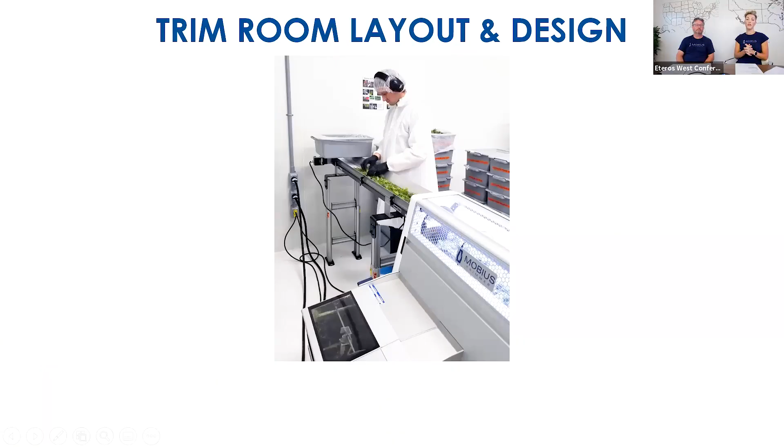So when we're taking a look at trim room layout and design, airflow and temperature management are the 2 key factors you want to take a look at. A lot of you may or may not have the ability to make a lot of changes to this in your facility, but ideally we want to be keeping the temperature in the room as low as possible. So in Canada, we would say trying for 18 degrees Celsius or lower. In the States, that's about 64, 65 degrees Fahrenheit or lower.

That's really going to help out with managing the resin buildup on the product and just keeping the product in nice condition as it's in the totes waiting to get trimmed or after processing. So trying to keep that temperature down low, and airflow really helps there as well. We want to make sure not only is the room staying cool, but that it's staying nice and clean in there. So air handling units connected to the room.

If you've already got a full build out and you feel like you need a bit of a boost there, if you can invest in some air conditioning units for the room, that will really, really help out. Second thing, if it's possible to have two entry and exit ways in the room, that is really helpful for preventing bottlenecks. So if you're in the midst right now of planning for construction or doing a renovation and you haven't put that into your plans, try to have those two separate entrance and exit points for the room.

If you've only got one because you're already built out and you've just got a single door, and actually that's the situation for Curtis's facility, try and have a recognized flow of traffic for the room so people know where things are coming in and the timing for that, and how things are moving out of the room, because you're not generally just talking about people moving in and out, but you're moving in carts and totes, maybe scales, things like that. So you need to be managing that traffic.

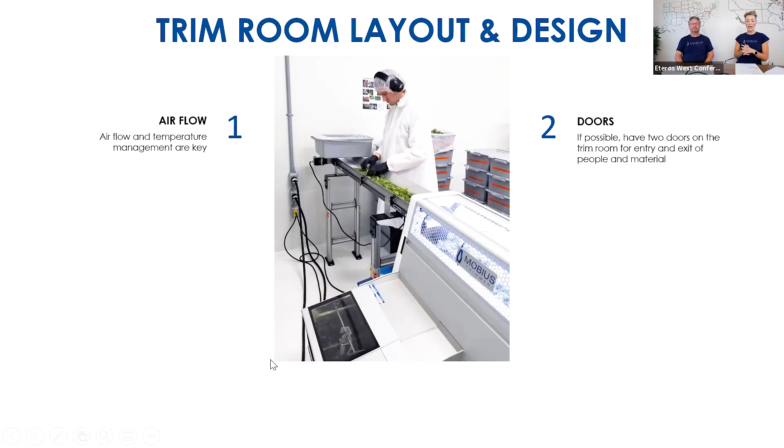Clear out the room to the greatest extent possible. So I went into a trim room last month, and it was a pretty tiny room, and it seemed extremely cramped. When we started looking around the room, there were brooms in the corners, some tools, some tubing that had been stacked up. There was a giant tote in one corner with cleaning materials, even though this wasn't the cleaning room. And by the time we cleared everything out, there was plenty of room to be running a tandem line in that room. So get rid of any extraneous materials that aren't there for your operations. And that is going to make setup a lot easier and prevent any kind of bottlenecks or oversights.

So that then leads to the next point, and that is around planning for circulation space. So when you're trimming, it is not necessarily just a static activity. Sure, you've got the people that are stationed at the in-feed and the out-feed doing QC, but we need to have somebody who is checking on the trim tote getting full. We need to have totes of material coming into the room. We've got totes of material leaving the room. So having circulation space around the equipment is really key. So again, empty the space out and plan to have circulation around the overall trim lineup.

Electrical connections. So to the greatest extent possible, try and locate your electrical connections near the trimmer. So on the Mobius trimmer, the electrical connection is on the back side of the machine. So we would generally recommend that the back side of the machine is adjacent to the wall where you have your plug-in point. If you're working from plugins on the ceiling, try and have a power cord long enough so that it drops onto the floor first to take the weight of the connection point before going up into the ceiling, and you'll be preventing shorts.

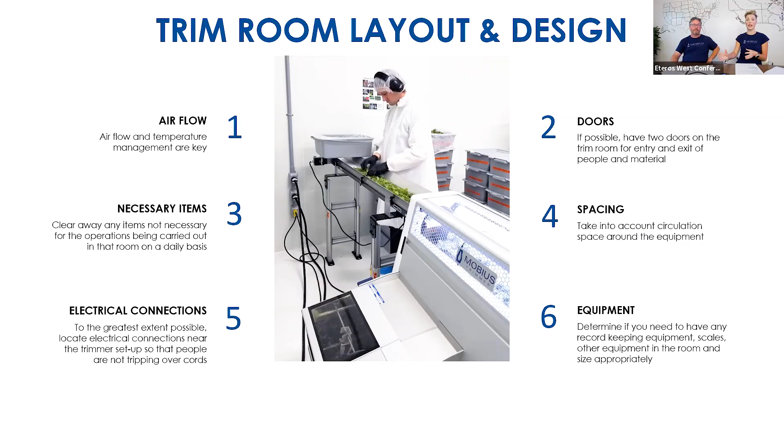So think about the traffic flow between those locations. And then finally, under trim room layout and design, think about where the equipment will be washed at the end of each trim day. So are you going to be rolling it out into a separate wash bay? And if so, is that wash bay all the way across at the other end of the facility?

If you have the ability to change that location, you'd like to have it as close as possible to the trim room. Oftentimes it's the wash bay that can't be moved because you've got drainage and that in there. So if it's possible to move your trim room closer to it, that's ideal.

Cleaning is something that we're going to have a totally separate webinar topic on because it's a really big topic. But if you are going to be doing cleaning either in a separate wash bay or even inside the trim room, think about how you are allocating space to store the equipment when it's not in use and to leave it out to dry. So after washing, it's not good to be leaving stuff out there unless it can properly dry. So leave yourself enough space, enough horizontal surfaces so that things can be cleaned properly and dried properly.

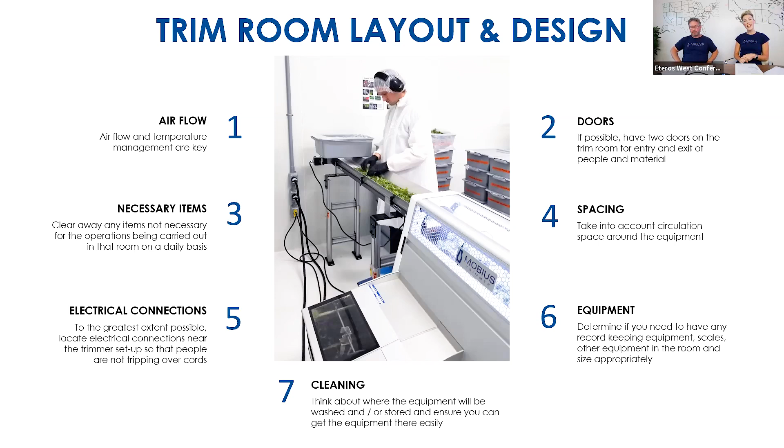I'm going to hand it over to Curtis now to speak to some of his experiences in setting up the trim room at Can Group. Just before you do, if I can just jump in real quick here, don't forget, guys, you got a whole team there, and there's always going to be one person in charge who has to make the final decision. But don't be afraid to ask your whole trim team, hey, what sort of space do you need? How do you envision this flow going? It's great to put all your minds together and come together with something that works for everyone.

Good point. That's exactly it, Brett. I was going to say, you've always got to be willing to work with the team. The team is what's making the machine work. If the machine's not working because the team's not working, then you're losing money. We've spent great money on a great machine. We want to make sure it's working best. So that being said, always be willing to experiment with the layout of your machine and your room.

Know that you need at least 2 feet of walking space around any piece of equipment. So whether you've got the trim tote to come out, or you've got a collection tote, or you've got the in-feed conveyor, give yourself at least 2 feet behind every worker. So that if you're walking through with a tote in your hand, out front of you like this, you don't accidentally bump somebody who has a pair of scissors in their hand. It's just easy to give yourself the space and not worry about it later. That's pretty much it for that.

The trimmer can be set up on the original visit by Mobius, but that's not necessarily a dead set way that it has to be. Our trim room was originally set up with the vacuum being put towards the wall, the trim tote being put towards the wall. But our workflow in our room prevented us from having an even flow and an even movement. So we just inverted the machine and turned it around.

All right, back to me for product handling and flow. So a lot of what I want to talk about here is just some comfort items and convenience items that you can give a little thought to beforehand. So whether I'm working on my car or whatever else, I always like to make sure my tools are set out within reach. I know what I'm going to need. I don't have to climb out from under the car, go back to the workshop, get a wrench, blah, blah, blah. So a lot of that is what I'm going to sort of cover here in relation to the trim room.

Let's start off with when you think about what the convenience items are and how to gain your efficiencies, we always recommend conveyors. Our machine comes with a hopper that you can hand feed, but a conveyor provides that extra consistency, etc. So I had a call from a guy, bought the conveyors and says, gee whiz, they don't fit in the room. Said, hey, try kicking the infeed to an L and see if that works. And sure enough, it did. So the L wasn't the ideal layout compared to a straight line, but compared to not having one at all, it was fantastic. It was definitely a worthwhile compromise.

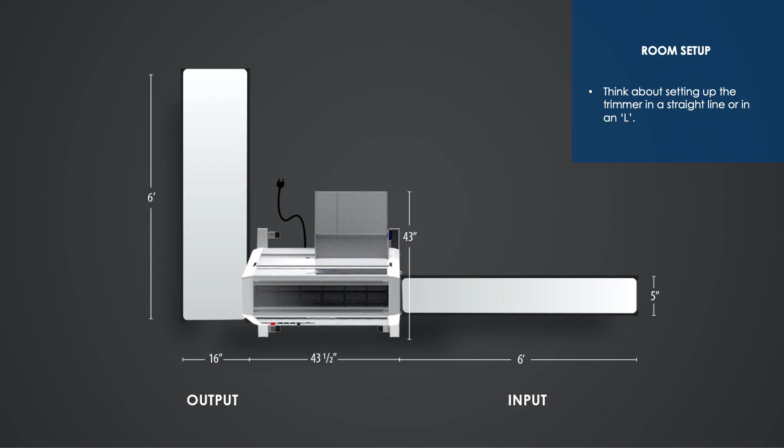When you're on your infeed, you want to think about providing the infeed position with anti-fatigue mats. Comfortable employees are more productive. They're not going to wear out. They're going to give you more consistent results and just be happier in general. So give them an anti-fatigue mat on that epoxy floor of yours or the concrete floor, so they don't mind standing there all shift long. Also outfit your staff with comfortable, easy to wear, high quality hearing protection. These machines are loud. No two ways about that. And so the more comfortable and better protected they can be from their environment, the happier and more productive they're going to be.

As a matter of preparation, quite often the material comes into the room bagged. Now that bag might be tied in a knot at the top, or it might be sealed with a zip tie or some kind of a twist tie, etc. So get ahead of the game a little bit, untie the bags before you need them, before you run out of material. In the case of a tied bag, it's just a matter of convenience. In the case of a bag that has a zip tie or a twist tie, those are items that can fall into your conveyor and shoot through the machine. So it's kind of an ounce of prevention being worth a pound of cure there as well.

You want to have your material that you're about to trim prepared at an ergonomic height, something that's easy for the infeed operator to reach, to access, so they never have to leave their position. So the common practice: you've got the operator, you've got the infeed conveyor belt, and in behind you've got totes raised up to a comfortable height that the person can reach across the belt either by hand or with a scoop and fill the belt. So they're not bending at the waist, bending down, coming up, bending down, coming up.

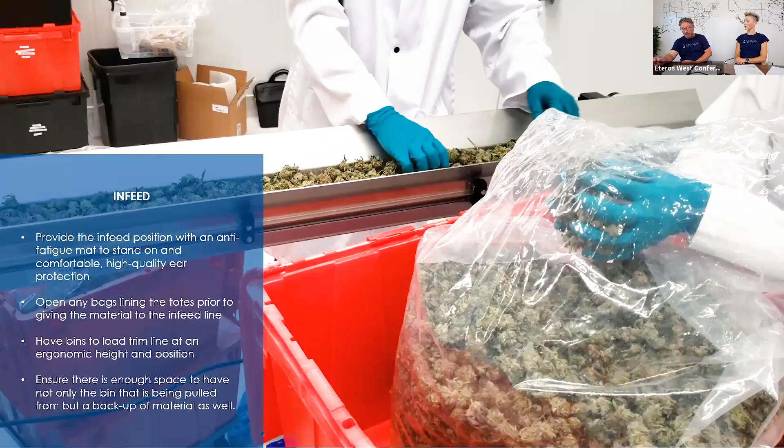So part of that preparation also is not just the space for one bin or bag, but two, so that when that first bag runs out, that operator doesn't have to fumble and switch and whatnot. They've got the second one ready to go, and then a teammate can take the empty away and put a fresh full one there. So just one of those things that will maximize efficiency for you.

On the trim tote, what you want to make sure of on the back side of the machine when you're monitoring your trim tote levels, when it comes time to shut things down for a moment and swap out that trim tote, you want to make sure, again, you've got that 2-foot barrier. You can get behind the machine.

You're not opening the trim tote like banging into a wall. You've got the room to operate there and have a second trim tote sitting right there ready to go, so you make that swap as timely and efficient as you can.

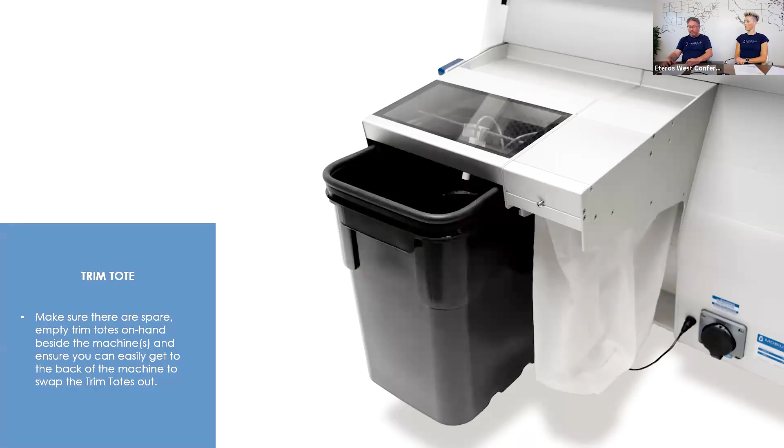On the outfeed, it's going to be very similar to the infeed with a couple of additional things there. You're going to want comfortable seating, whether it's a stool that rolls around or a chair, again with your hearing protection. And also think about your investment in a high quality tool. So don't go cheap on your trim scissors, etc. Get a good quality set of scissors in the hands of your operators so they can perform longer, better, etc. Not wearing their fingers out quite so much.

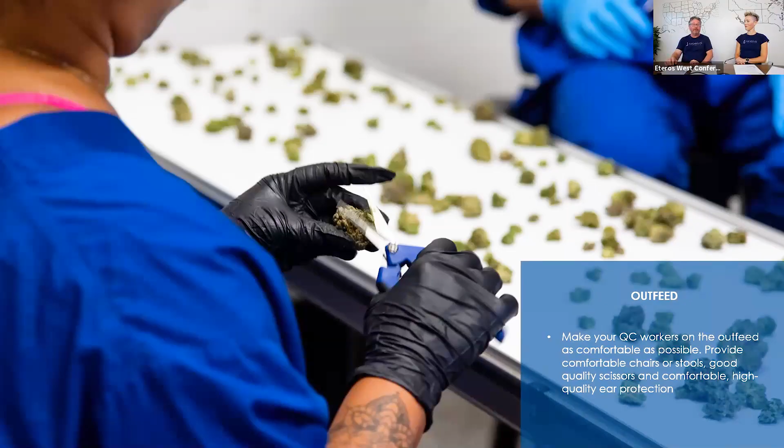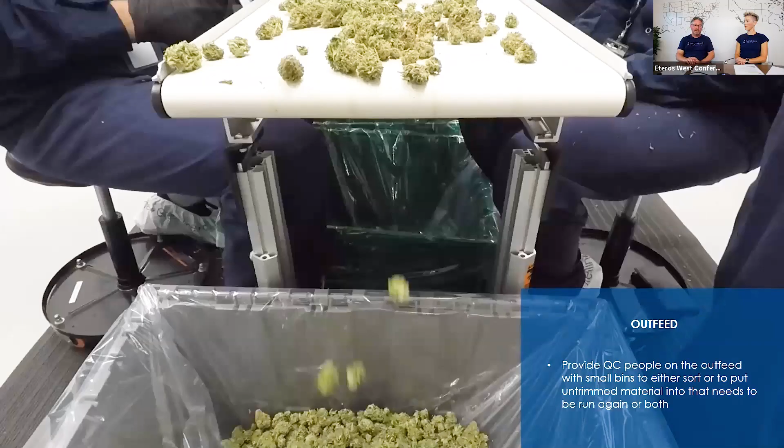Another great idea for the outfeed guys is to have a couple of smaller bins, whether it's a trim tray on your lap or a bin hanging off the side of the conveyor, etc., that you can on the fly pick out smalls, or in the case of something that's come out of the trimmer that's not quite trimmed, you don't want to spend a bunch of time snipping away at that bud. You just want a couple of snips, 2 or 3, and if it's more than that, just set it in a bin, and every so often you can take that bin, send it back through the trimmer, so you're not wasting valuable man hours on actually hand trimming. Let the machine do the work.

So I think there's my final point. I covered it without even looking at my points here. That's how good you are, Brett. Wow. So I'm going to hand over to Kurtyss here to sort of add to what I've just said there.

Absolutely, Brett. It is crucial, what you said, to have that second tray for when you see those smalls. Smalls are generally not the problem. Smalls just go, they make it through. If you have a sorting machine, that takes care of smalls. It's the large ones that we want to see. The machine missed it because it was in the clump. That's not a problem. You see it come out, you see it has tips. Put it on the tray.

Then your floater can come by when he sees that tray that's large, pick it up, and he just shakes it out under the infeed. Doesn't even take a second. 2 snips, let it rip. If you're sitting there staring at the bud, you're wasting time, you're wasting money. I mean, we're not here to appreciate it, we're here to produce a product. So if you touch it more than 3 times, you're playing with it. Send it down the line, send it up the line, just get it going.

So pretty much make sure that the bucker is fed, because the bucker is the start of the machine. If you have one, you're laughing. If you don't have one, then you've got people sitting at a table debudding and taking everything off a branch. Well, that takes time, and that's what the bucker's for. So get it clean, get the bucker working fast, and make sure that it's always feeding that infeed conveyor.

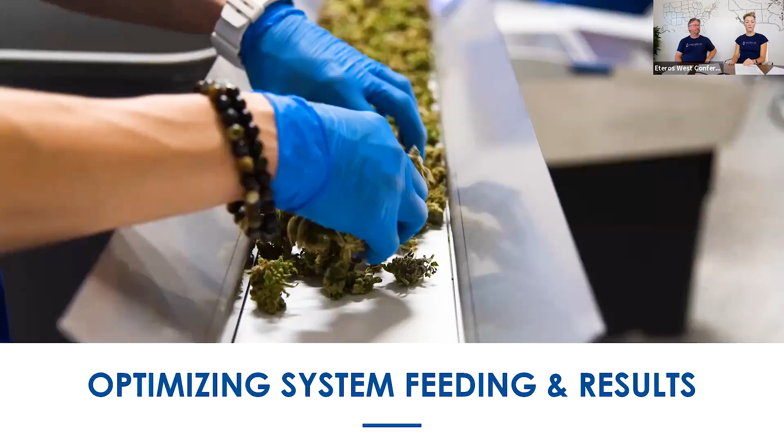Okay, so we'll head into the third section here. The third section is around optimizing system feeding and results. So we are huge fans of in-feed conveyors. If you want to maximize your productivity and really increase quality, it is necessary to have an in-feed conveyor. There are some different ways to approach things on QC if you don't have an outfeed conveyor, but it's really tough to replicate an in-feed conveyor with anything else.

So there's 3 reasons why you'd want to have an in-feed conveyor. One of them is around catching foreign objects. Brett just spoke about this a moment ago, where as you are bringing totes into the room, if they've got a zip tie or anything like that around them, there's a potential they can go into there. Over the past month, I have heard of scissors, bolts, nails, zip ties, and gloves all going through the machine or being caught just before going through the machine for those that are using an in-feed conveyor.

Those that are using just a tote to load the hopper have had some struggles. So having that in-feed conveyor to do the visual inspection to pull out any foreign objects that manage to get in there is key. The second thing is a consistent feed rate. For a lot of people, this is the most important piece. It's really challenging to get a consistent feed rate if you're using an in-feed hopper.

What happens is material gets swept into the machine, so it pulses it, and then the operator generally has to wait for it to move through before they sweep in the next batch of material. With the in-feed conveyor, you've got a consistent amount of material being moved into the machine all the time. And when you've got a consistent feed rate, that gives you consistent results on the outfeed.

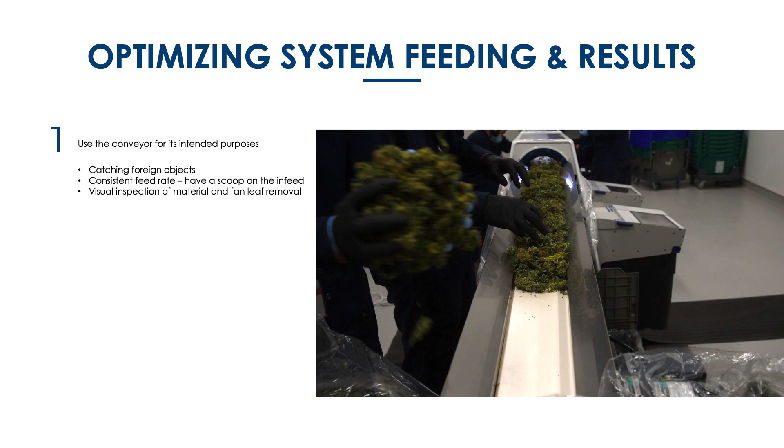The machine is more than capable of handling those fan leaves, but the problem is if you're feeding them through the machine, you are reducing your throughput rate, and you're also watering down your trim. So if those fan leaves can be removed while it's growing, before bucking, after bucking, or on the in-feed conveyor as it's moving into the trimmer, you're not going to be watering down your trim. So that in-feed conveyor just gives you an extra opportunity to be removing that.

This one is pretty specific to the Mobius, and that is to look for the wedge. Anybody who is an existing Mobius user has probably noticed this before. When you're standing in front of the machine and you're looking down at the in-feed, you're going to see the blade that's the furthest away from you is going to be a little bit exposed when you're operating the equipment and you're feeding it. We use that as a visual indicator of how full the tumbler is.

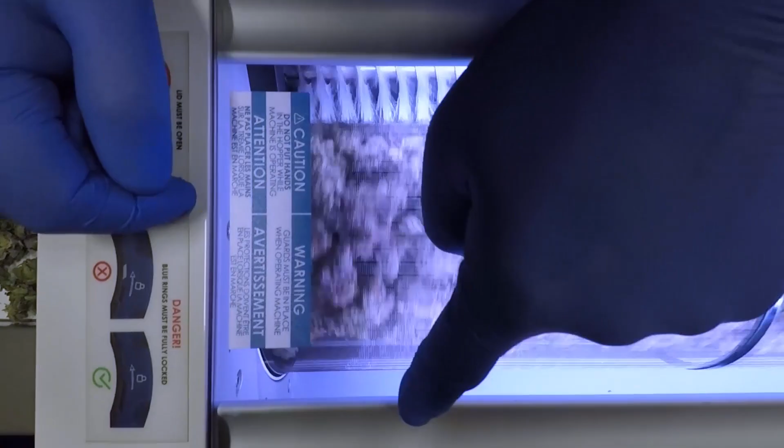You should be noticing a wedge that's maybe about 4 inches long, and that is an appropriate fullness level. When that starts extending out and you can see 6 or 12 inches of that back blade, the tumbler is likely not full enough. When you can't see any of that back blade at all, then the tumbler is too full. So for those of you using your Mobius right now, look for a little bit of exposed back blade there, and that is probably a good indicator of your tumbler being the right amount of fullness.

Again, specific to the Mobius. So if you're wet trimming, we want to make sure that your vacuum is at maximum. So remember, all the Mobius dials go to 11. They don't just go to 10. We have that extra little bump there so that they can go to 11.

So when you're trimming wet, you want to have vacuum on maximum and just be using the in-feed rate on the conveyor or as you're moving it in from the hopper, and your tilt angle to be dictating trim quality. So your in-feed rate on the conveyor is the horizontal push of material through the machine. So the faster you're pushing material through, the looser the trim is going to be. The slower you're pushing it through the machine, the tighter the trim is going to be.

Same thing with the tilt angle. The more gravity you're using, the higher the tilt angle, the looser the trim is going to be because you're moving it through more quickly, and vice versa. So that's for wet trimming: max vacuum, tilt angle, and feed rate.

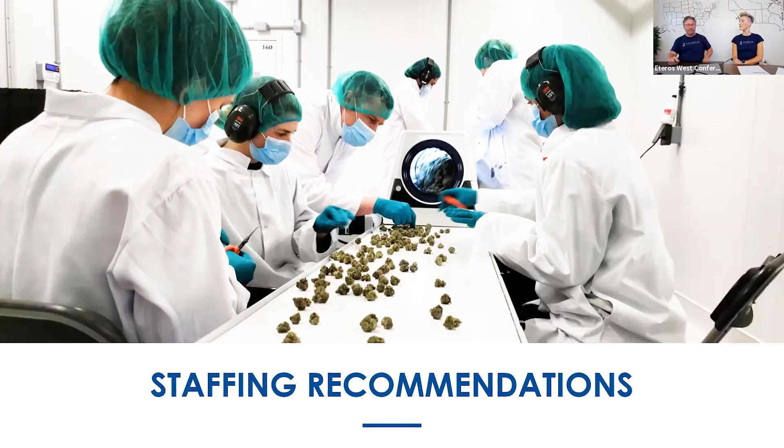You're always going to have a trim team lead, kind of the quarterback, and that person may be the floater. We'll touch on floater in a second. But generally, starting with the in-feed, you're going to have 1 to 2 people on in-feed, depending on what your material prep looks like. So in Curtis's case, they're doing bucking right beside the conveyor belt and de-leafing as the second in-feed person. So the first one de-leafing, the second one feeding the flower into the belt. So 1 to 2 people on in-feed.

You'd have 2 to 4 people on out-feed that are going to be doing what we touched on earlier in the outfeed ergonomics, sorting out large or not fully trimmed, polishing up, etc., and away you go. So again, it sort of depends on your process, how tight your trim is, what exactly you want out of the end product, but 2 to 4 people on outfeed is a fairly typical number.

And then we have a floater who, again, could be that trim lead person. And they're going to support really everyone in the room. They're going to make sure that empty totes are removed, full totes are brought in. The floater might be responsible for documentation, weighing, QCing, making sure that the settings on the machine are producing the optimal for their desired trim level, et cetera. So all told, you're talking up to about 7 people. Very often, AJ, if I'm correct on this, we see an average of about 5.

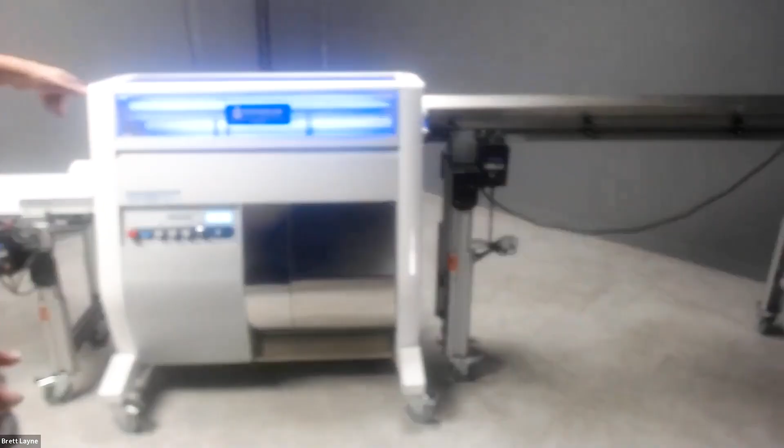Gotcha. So I'm just going to dive right on in and give you what I like to say, a good look under the hood and see the incredible engineering that went behind the design of this machine. So the first thing, this is what a complete single line looks like. It's not in tandem, obviously, as you can see, but this is what an in-feed conveyor feeding a single M108S and an out-feed conveyor looks like. I'm going to go ahead and break it apart and give you a little description piece by piece as to sort of the magic sauce behind all of our components here.

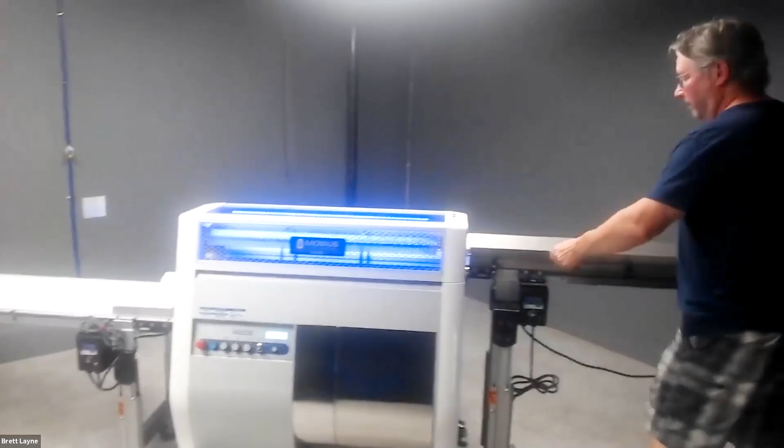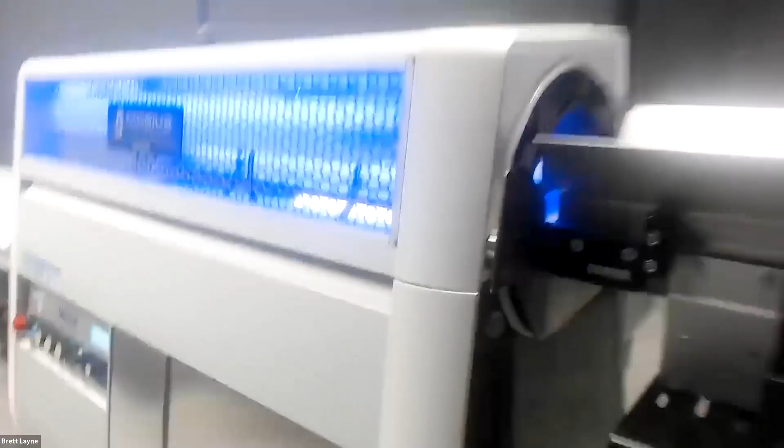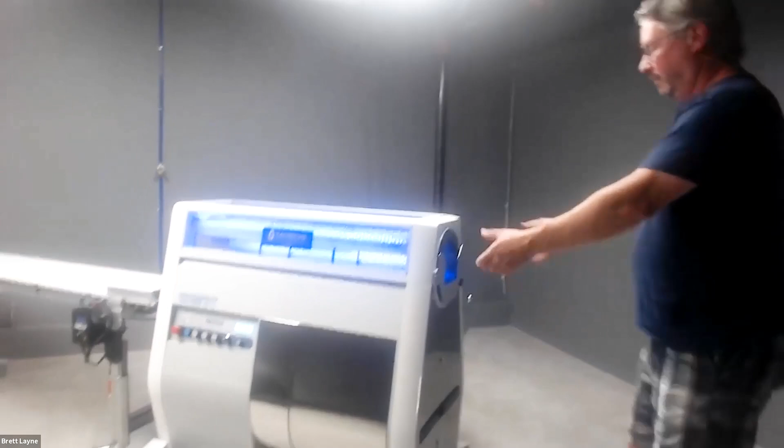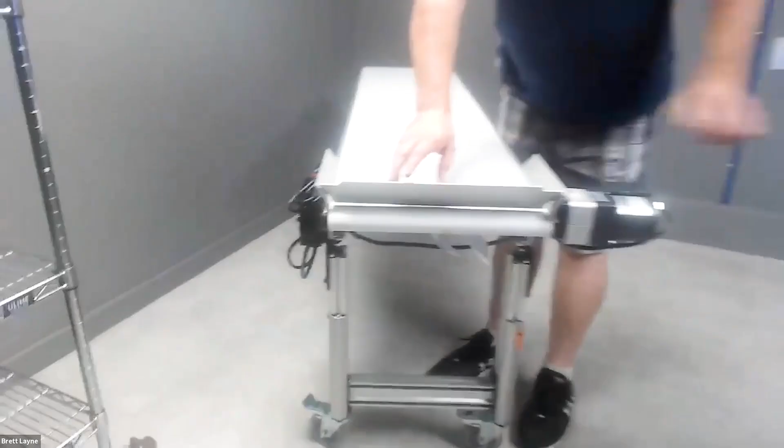Okay, now I'll break her on down here. So we're going to get this in-feed conveyor out of the way. Get rid of the guide. We'll roll the out-feed conveyor out of the way. So guys, you'll notice on our out-feed conveyor, the kick plates here are profiled to line up nicely with the Mobius out-feed end. And it's also designed so that when you do turn it 90 like we talked about, it still mates up nicely and collects that material.

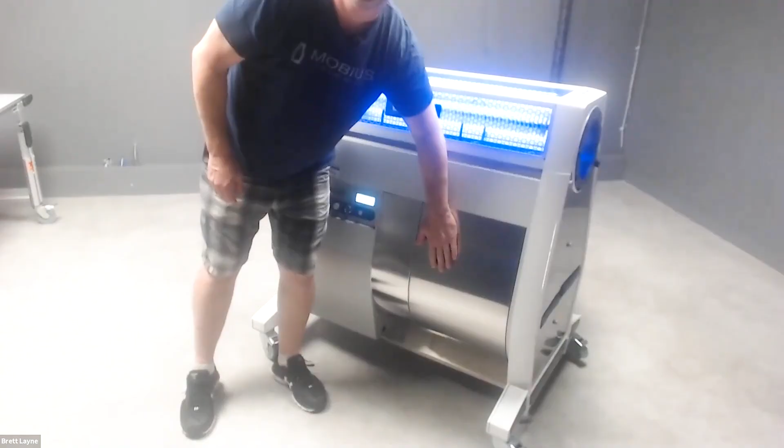When you look at the M108S, it's different from every other machine on the market. First off, this is the entire machine. It has an onboard vac, an onboard trim separator, so there's no hoses leading off to some other piece of infrastructure that you gotta buy, you gotta clean, etc. It's all here in one neat package. The only thing leading away from this machine is the power cord.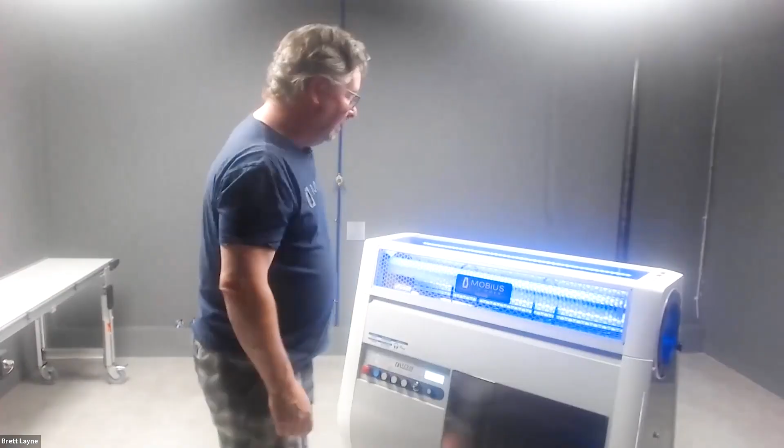So first thing that people notice all the time is the light in the lid. And we get asked, is that UV, infrared, all kinds of different things like that. The truth is, it tells you the state of the machine. So in a loud trim room setup, we've got some million-plus square foot grows that are running 3 and 4 tandem lines. If something goes faulty with the machine, everybody in the trim room knows right away.

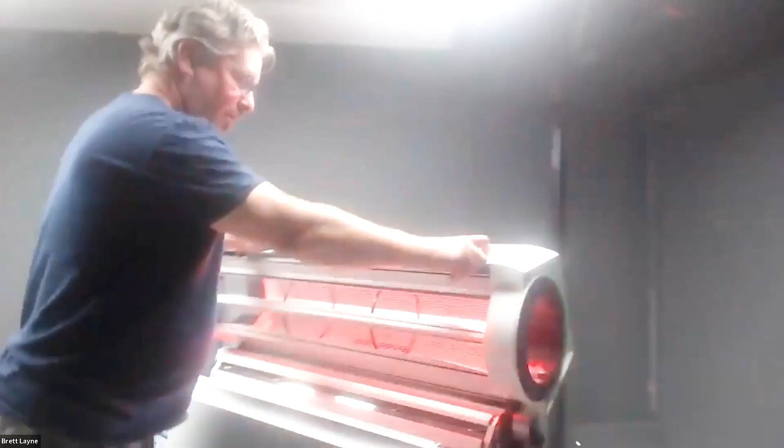So red is a stop state, not operable. Blue is ready to run. And then white is its running state. And when it's in its running state, the individual controls like the blades, the vac, and the tumbler are all individually adjustable from there. So we're going to go ahead and pop open the lid here and show you a couple of really cool things.

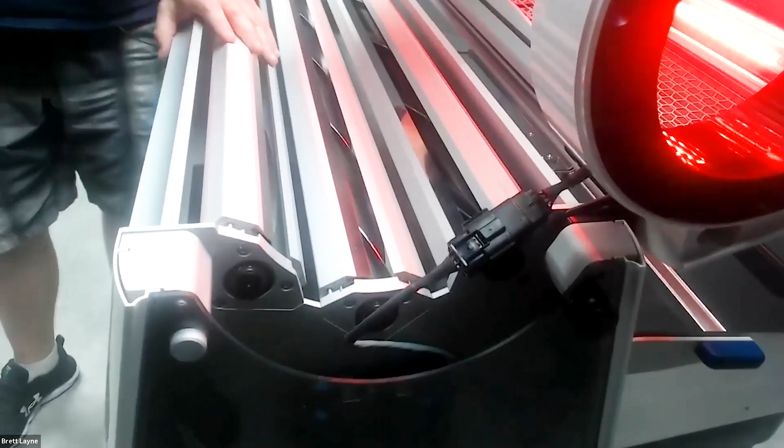So in here we've got our patented Triflex cutter system, and we've got 3 cutters instead of the norm you see out there as 1. So 36 inches each times 3, that's where we get the M108 name from, 108 inches of actual cutting length. So you get 3 times the cutting opportunity per revolution of the tumbler, which translates to less dwell time and massive throughputs.

This whole system. Oh, we're going to rack them. Oh, okay. You want to step over this side? Yes. Perfect.

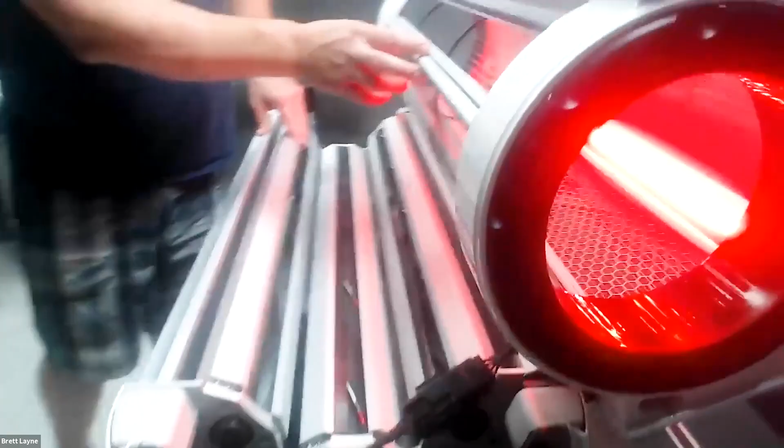So these are the racks that come with the hot swap kit that Curtis was talking about. So this is our flexible bed knife. Just before I dismantle it, let me just touch on the design aspect of this. On the bottom, these are the triangle bars we were talking about just moments ago. On the bottom of the triangle bars, we've got these black rubber O-ring gaskets, and they serve two functions. One, they seal it off so that all of the vacuum is drawn just through the aperture in the cutters. So you're not losing vac pressure to just atmosphere.

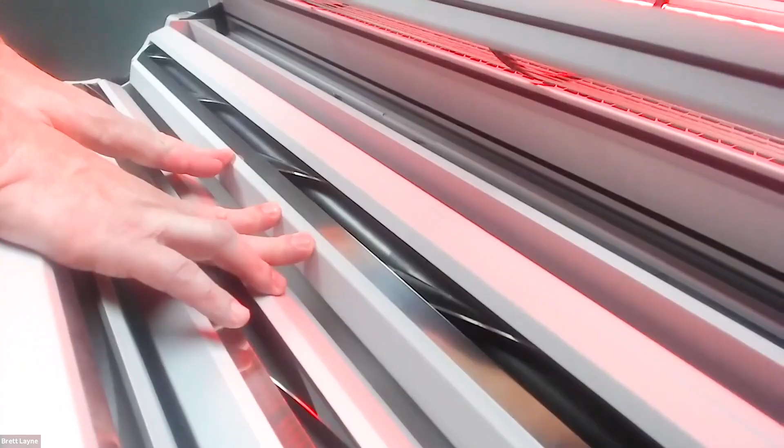Secondarily, and really importantly, these O-rings will actually flex the bed knife when you shut the lid. If you can see that bed knife flexing, it flexes it into the helical blade. And if you were to take a real close look and follow the path of the helical as it's spinning, you would see that the blade itself is flexing and waving. We call it walking bed knife over the helical blade.

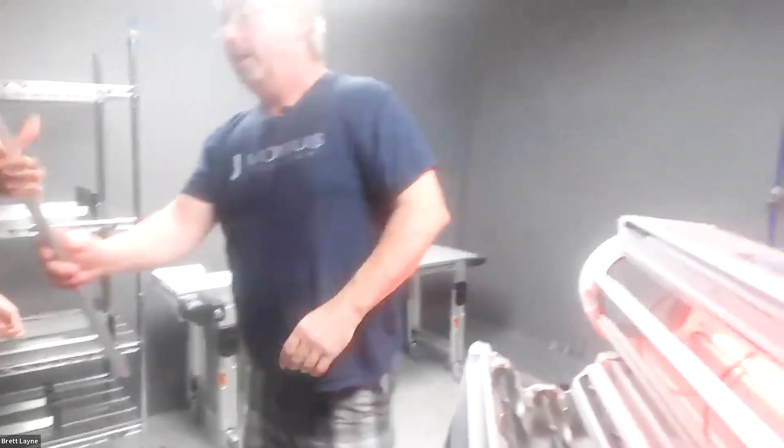So that is what produces the only true bypassing scissor cut of any machine on the market. Everybody else has a rigid blade riding against their helical, but it doesn't do that true scissoring action. It just doesn't do as clean and crisp a cut. That clean, crisp cut, I'll hand these to AJ. That clean, crisp cut contributes to a couple of things. It's nice and tight to the flower, but also it makes your trim really beautiful and viable. So when you look in the trim tote at the end, your trim's light and fluffy and really nice for use in extracts, etc. It's not all, I always say, kind of snotty like in a lawnmower.

So just before I take this last component out, you'll see that these helical blades, the bearing blocks on the helical blades, are set so that these guys, the spacer bars, just slip right onto the system there. Same with the bed knife on the other side. And that's it. They're in perfect calibration within a couple of thou of being dead on. So there are no calibrations. There's no clicks, etc. When this system sets in here, it's ready to trim right now perfectly every time.

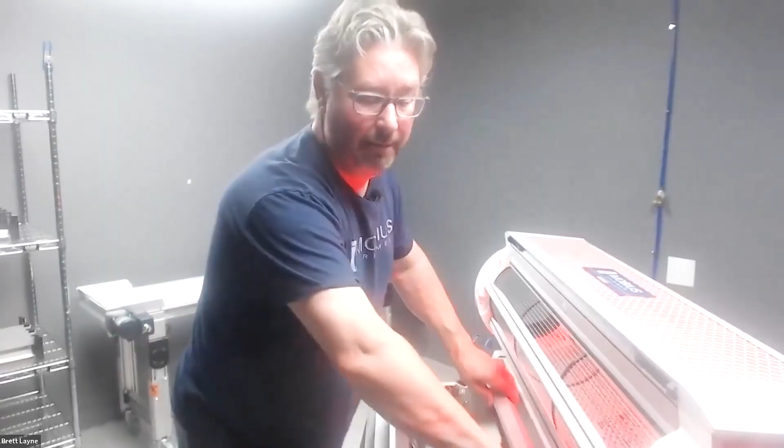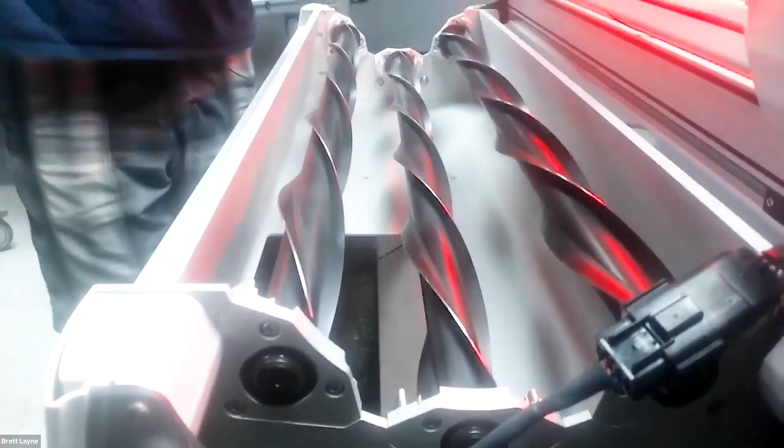So this is the helical blade. Guys, as a legal disclaimer here, always wear gloves, never handle them in a vertical orientation. If they slide through your hand, it's gonna cut you to the bone. I've done this a few dozen times, so I'm pretty confident, but that's our helical blade here. So I'll hand a couple of them over to AJ, and then I'll stop and give you a little description on the final one.

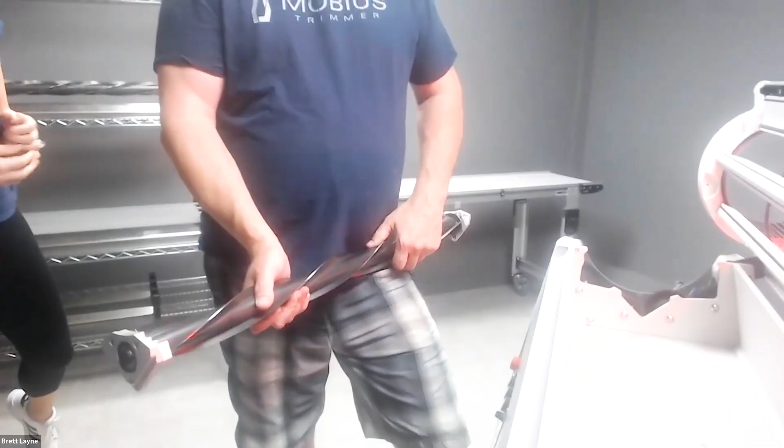So something I usually mention right off the top, guys: when we say we hand build this machine, that is the exact truth. We build every component on this machine that can be built by us here. We're our own CNC, our own machining, our own metal fab, our own electrical department, all the rest of it. Like, we don't do the anodizing here. We don't produce the VFDs, but we wire them, et cetera.

And this is a great example right here, starting with the helical blade itself. There is nothing like this on the market. So the real smart people here at Eteros that predate my employment here invented and designed a triple TIG robotic spiralizing welder to produce our helicals from scratch to our specs. So you're not going to find them anywhere else.

Once they're produced, we send them out for liquid nitriding, case hardening. Then they go off for cylindrical grinding to make sure they're perfectly round. And when they get returned to us, we fit them with our bearing blocks, which again are manufactured about 15 feet away from me downstairs in our CNC shop. And this is a slip relationship, an outer part and an inner part.

So when we fix this onto the helicals, we then put it into a precision calibrating jig, lock it in place, and then torque these bolts down to spec. And that's what keeps your cutter relationship perfect 100% of the time with no calibration needed.

Question on the blades: how often do they need to be serviced or sharpened? Okay, so the blades, great question. The blades are self-sharpening. They are a wear part, and they have an expected service life of about 200 hours on the bed knives, and on the helical blades, it's about 1,000 hours. The 1,000 hours on the helical blade isn't so much a reference to the helical itself. The helical itself would take forever to wear out, but it's the bearings inside the blocks.

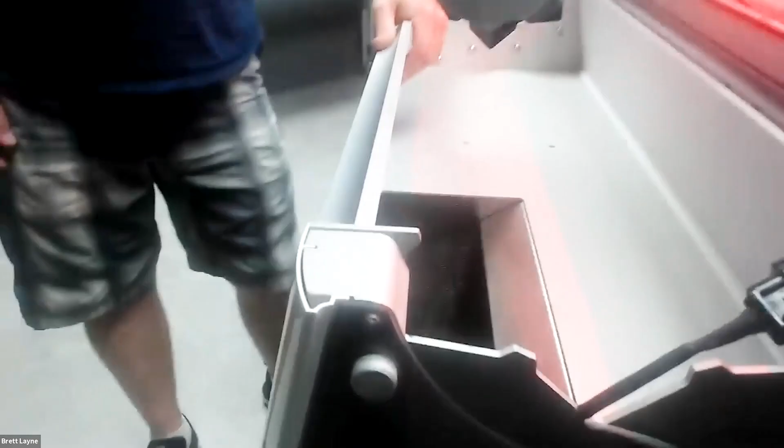Okay, so that's how easily the cutting system comes apart. So next we'll talk about our patented wire thread tension tumbler. So this is super cool. The whole idea behind the patented wire thread tension tumbler is its ability to not only have a super slender profile and get the product down as tight to the cutting system as possible, but it's also perfectly cylindrical.

So every other trimmer on the market has a stamped metal tumbler, and they don't even come brand new from the factory perfectly cylindrical. They have a little bit of oblong, a little bit of wobble to them, and they're gonna have dead spots. There's times when that bud is reasonably close to the cutter, but then there's other times where it's quite far away. And the more that tumbler gets beat up and bashed around, the worse it is. This guy is held under tension.

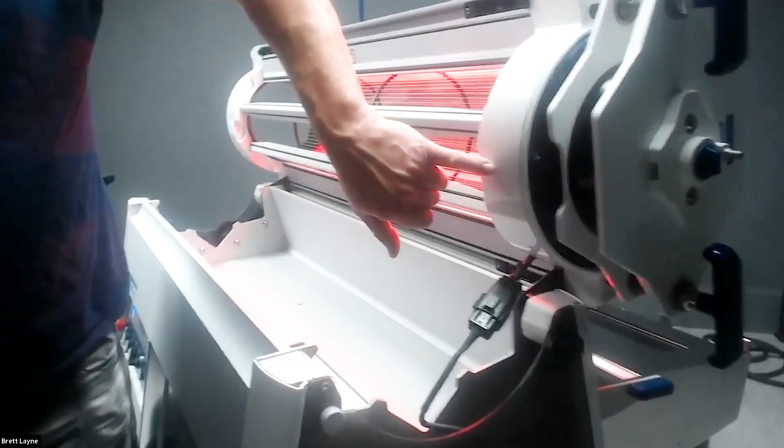AJ, are you going to go ahead and lock that in? I can. This is our spring jack tool. So we just lock on the spring jack, and we're going to add some air pressure to compress. There's about 2,500 pounds of spring action in here, about 72 little springs that hold this perfectly tensioned and perfectly even. So AJ is going to go ahead and pressurize that. You see the head move back about 1/4 of an inch, and now the tumbler is floppy.

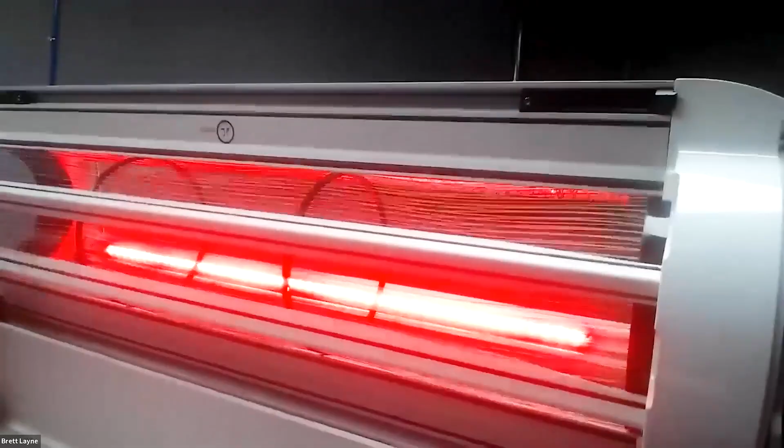Hey, Brett, do I have to have installed compressed air in my room? Heck no, it's awfully handy to have compressed air, but your spring jack tool will come with a pump very similar to this, if not identical. That'll take you probably about 30 seconds or so of pumping to achieve that compression. Or what we like to use at trade shows is just this little Air Hawk. It's like 60, 70 bucks at Home Depot or Lowe's, what have you. And it'll compress that down in maybe 6, 7 seconds.

House air is always a nice way to go though, because not only does it give you the quickness of this, you also have the air to blow down your components and get the dust off as well. So on this end now that we've got the tumbler detensioned, we're going to undo the blue locking ring. So a simple twist, and there's the blue locking ring removed. So now that gives us the ability to go around to the other side.

And we're just going to turn this guy right here to release the air pressure. Off comes the tool. And out comes the tumbler.

All right, I'm just going to make a quick aside here. For anybody that has the Mobius trimmer already, the early version, this is a spring pack that you just saw in action. The early version has an air piston, which necessitated this little raised tab here that would line up with this keyway. Going forward, you will very likely receive tumblers that no longer have that tab. The air piston lid required it. The spring pack lid doesn't. You're safe and sound either way. So we'll just set this guy aside.

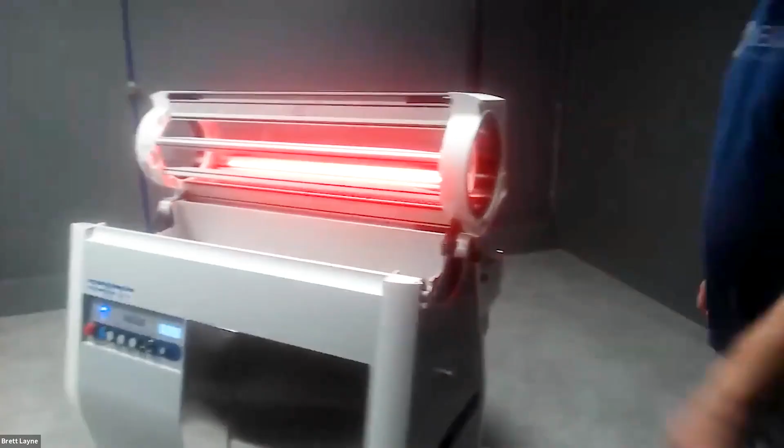Okay, I'm going to go ahead and just swing the machine around so we can see the back side. So I'll go ahead and unplug it. And we'll give her a little rotato. And here we are, guys. This is the back side of the machine. So this is our fan housing with the dust collection on the exhaust port. And then this is our trim tote that catches the trim leaves and our trim tote separator.

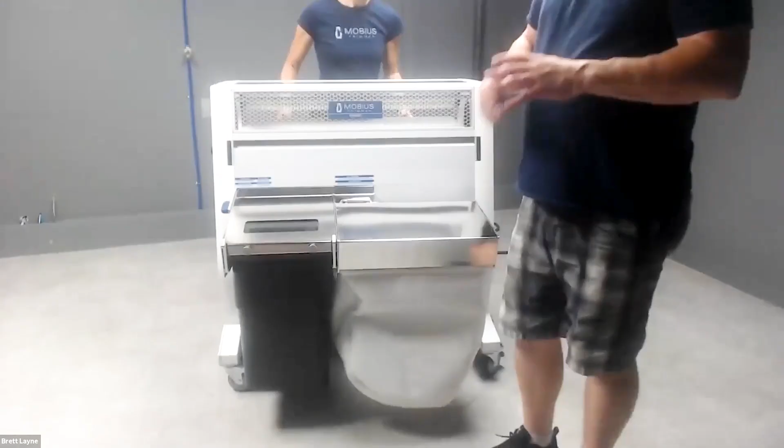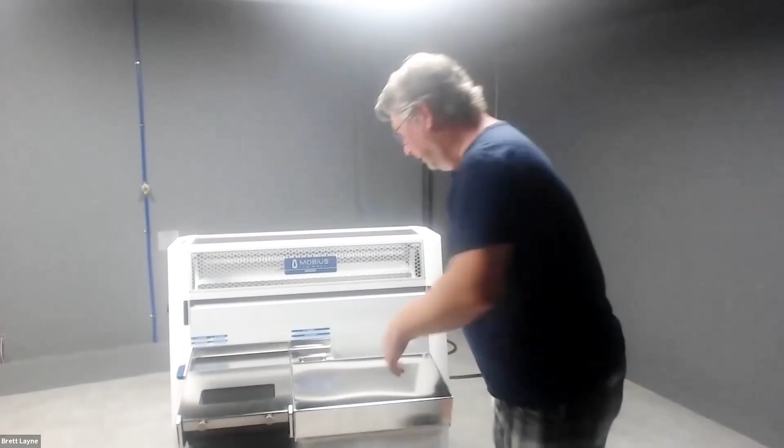So to take this guy apart, another thing I should have mentioned right off the top, a design element of the Mobius is that the spring jack tool is the only tool that you need. You don't need any other tools to completely dismantle this. I'm giving you a whole big diatribe as I go, but I can dismantle this machine by myself in like 1.5 minutes, 2 minutes tops. So we'll just pop this air filter off. Next, we're going to remove the trim tote. That's the trim tote removal.

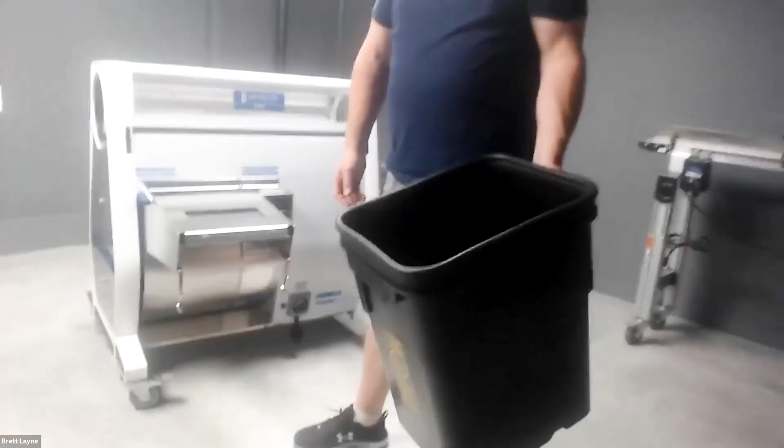Now we're going to loosen the separator by pressing down on what we call the hockey stick. Hey, we're Canadian, what do you expect? So we go ahead and push down on the hockey stick, and then we pull the separator out.

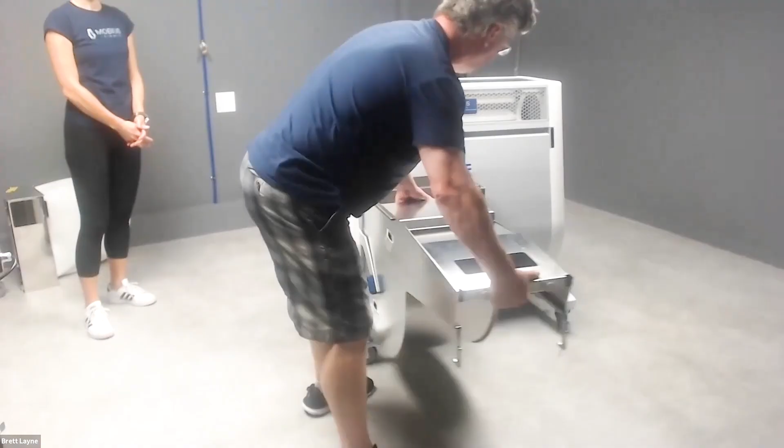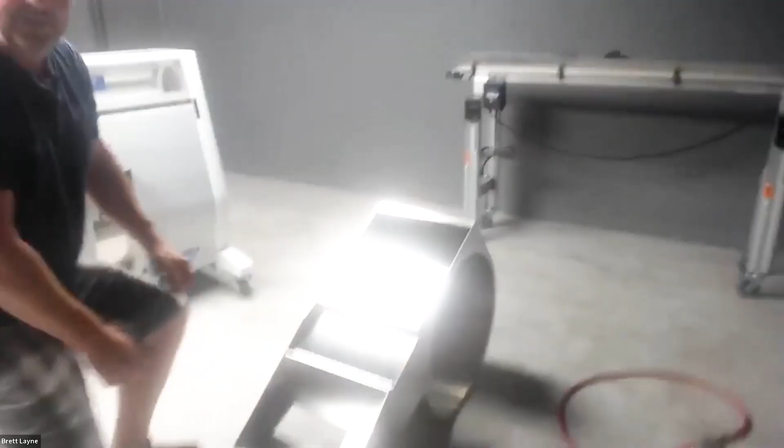So that's the separator, all smooth, optimized surfaces inside. It guides the trim on a bed of air into the trim tote, so your trim never touches a hose or an impeller, and makes it GMP compliant and 100% viable for all your extracts, etc. Now, the separator will break down further. Steph, if you want to focus on down here a sec. This will break down further just with a couple of thumb screws releasing the fascia. The window just slides out, and now you can access 100%, no hidden crevices, for your cleaning.

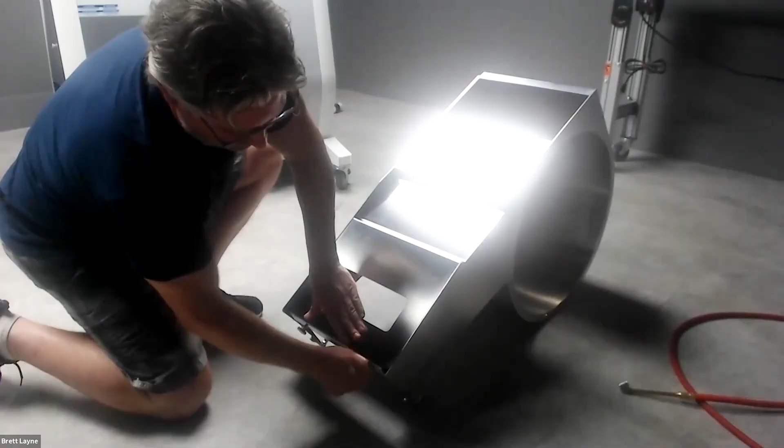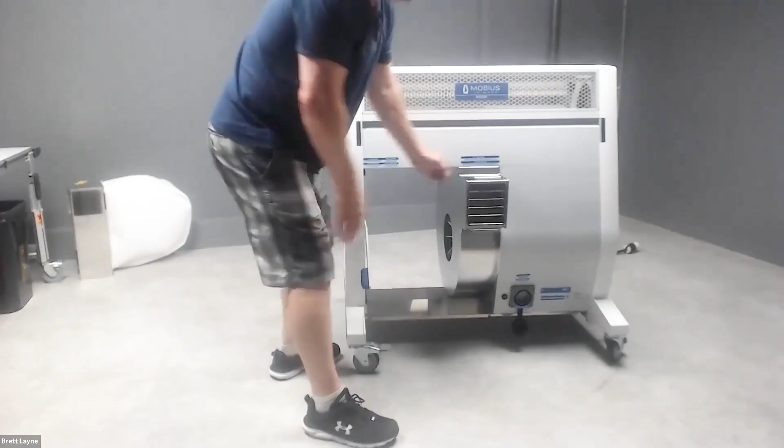This is the fan housing. So it rides on a, thanks AJ. Sorry. This is the fan housing. It rides on a couple of heavy pins. So we're just going to slide it to the left. And that's your fan housing ready to go off for cleaning as well.

And hey, Brett, would you be able to clean those two components with a power washer because they're stainless steel? Absolutely. Hit them with your power washer, spray down with some degreaser, leave it for, I don't know, what are you saying? When you've got the benefit of a hot water pressure washer like we have, just clean it now. With it, yeah, but certainly spray down with a degreaser, hit it with the hose or your pressure washer, and you're good to go.

Okay, even the screens will pop off here. Tool free, just a little bit of a latch there. I think I'll just put it right back on. While I'm at it, your top plate comes right off. That's just a spring system, just like the fly screen in your household window. And AJ is going to pop the brush out. That's that.

So if I'm not doing a bunch of explaining, as I say, I can break this whole sucker down in a minute and a half, 2 minutes, and away I go. Even the entire lid will remove effortlessly with no tools. Just a matter of undoing the electrical connection, rotate it slightly forward, lift it straight off, and that's it. So then to get her back on there, line up your hinges. Voila, all done. Reconnect your electrical, and away you go. So that's the dismantling of the machine.

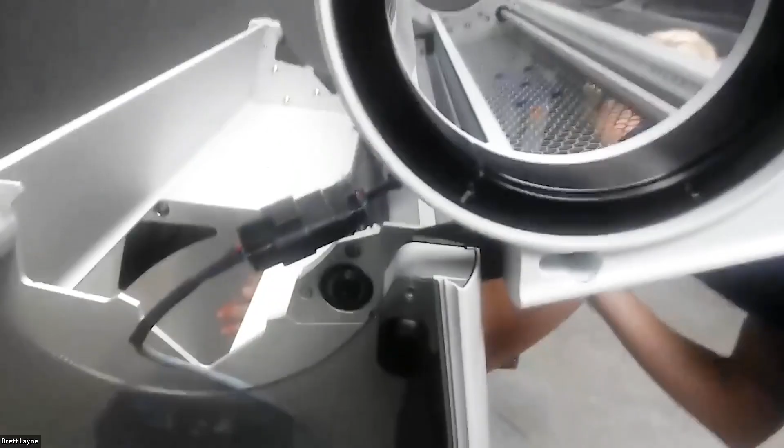So you can see that the engineering and the tolerances to which this is manufactured, everything has a beautiful, nice, tight, positive relationship.

While you guys are doing that, we had a question about tandem configurations. How do you lock two units together if you're going to run them in tandem? And once it's all together, I'll describe that for you as well. Sounds good. You bet.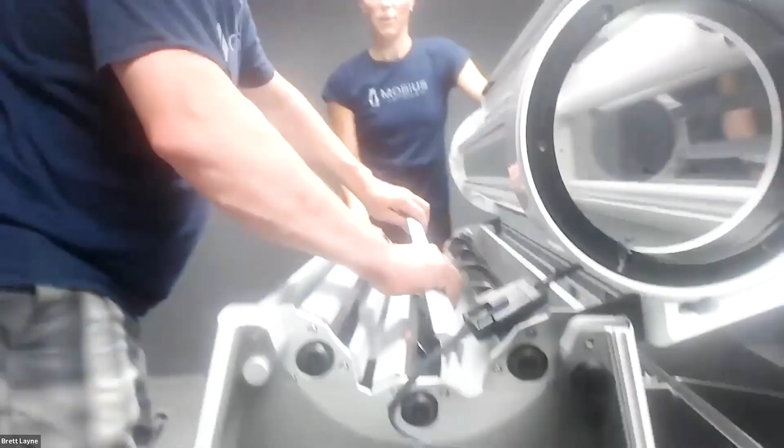As you guys are watching, you can notice that there is no tools or anything like that. They're literally just placing the parts right back into place. Super easy disassembly, just as easy on the assembly. Okay, in goes the tumbler. Because this tumbler does have the tab on it, I'm going to make sure to align it with this keyway. So this end will go in second.

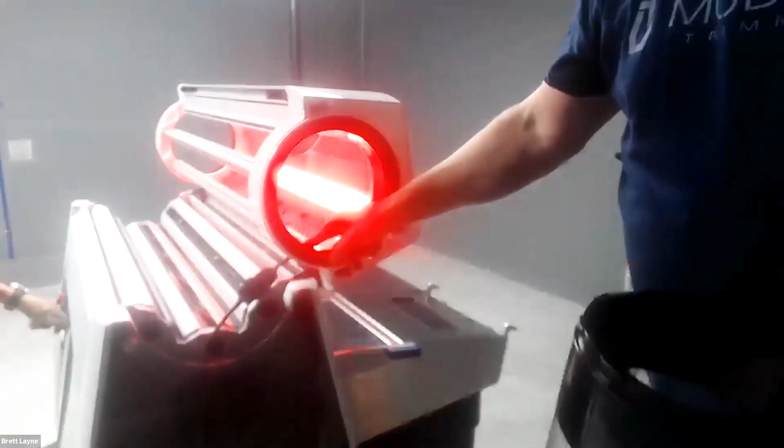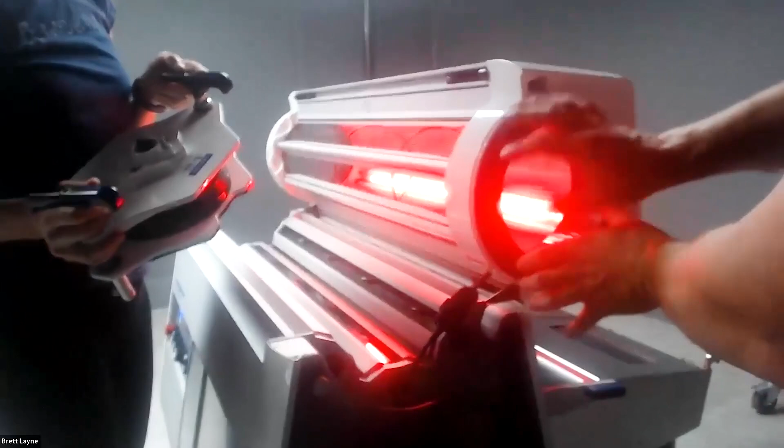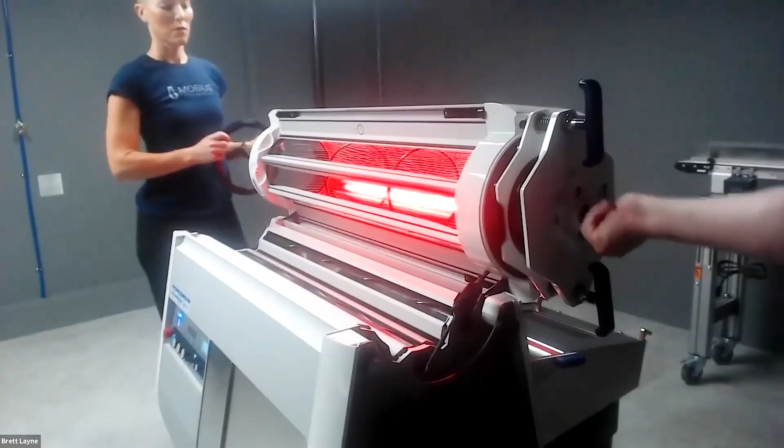Take a blue ring. Lock it. Very important when you're locking these blue rings, lock them 100% turned. Yeah, if you lock it portionally, that's going to put too much strain on it. So lock it 100%. On goes the spring jack. Lock the air chamber. Something like 90 to 100 PSI, compressing the spring.

AJ's got the blue ring on the other side. Now what AJ is doing just before we detension, she's just making sure that the cables are nice and straight. So I'm going to take one.

I'm not mic'd, so you can't hear me.

There we go. Okay, now that the cables are nice and straight, now we're just going to release that pressure again. Off comes the tool. And we're ready for action again here, guys. So, something I wanted to point out to you is the relationship of the cutter to the blade. So let's maybe put this into a friendlier light. Is that a little better?

When you have a look at the relationship between the ultra slender cable and the cutter, that relationship is something like just under 30 thou, which is about 7 pieces of paper thick. When you've got your perfectly round cylindrical tumbler riding just 30 thou above your cutter, that's as physically tight as you're ever going to get.

And to put that into perspective, 7 sheets of paper, half of a pair of scissors is probably about that thick or thicker. So unless you're just using scissor points, it's pretty comparable to laying a pair of scissors on the side. It's a fantastic cut, and people can't believe what's coming out the outfeed end.

Let's talk real quick about how to put this machine into tandem. So, Steph, if you can grab a look right here. This is what we call the tandem hooks. So that's on the outfeed end of the machine. So I'm going to get you to use your imagination somewhat here. To put it into tandem, it's got the onboard linear actuators that tilt the machine. So we simply raise the machine up.

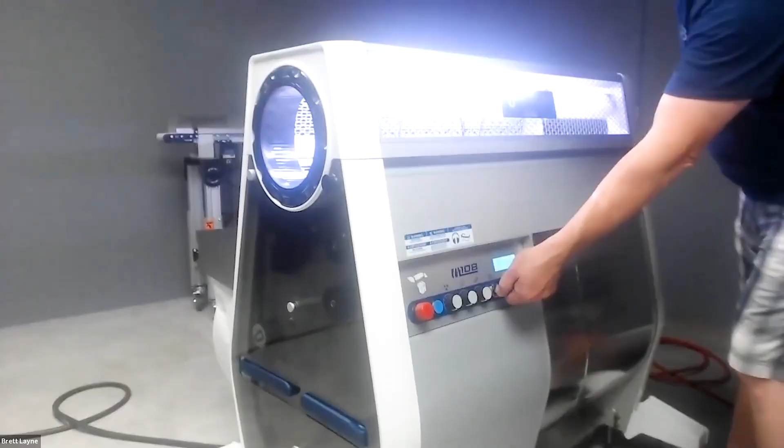So once the machine is sufficiently raised up, we take our lead machine, we roll it up and butt it up to this machine so that those blue tandem hooks are underneath the bumper of this machine. And then we use what's called tandem locks. We got these little popsicle guys that we just hang on the ends of these little nubbins and drop it back down.

So that's it. Once this is in a tandem situation, the onboard linear actuators are real stout. They'll handle about 2,500 pounds, I think I heard at one point. So once they're in conjunction, all you're doing in terms of tilt is operating the tilt on the lead machine. You don't have to touch this one again. And now every time you actuate this one, it'll tilt both machines in tandem in real time.

So huge difference from the competition out there. There's no rail systems. You're not adjusting each corner with a wrench to get your tilt, et cetera. You can micro adjust it in real time and see the results coming out the other end 30, 60 seconds later, depending on your dwell time through the tumbler.

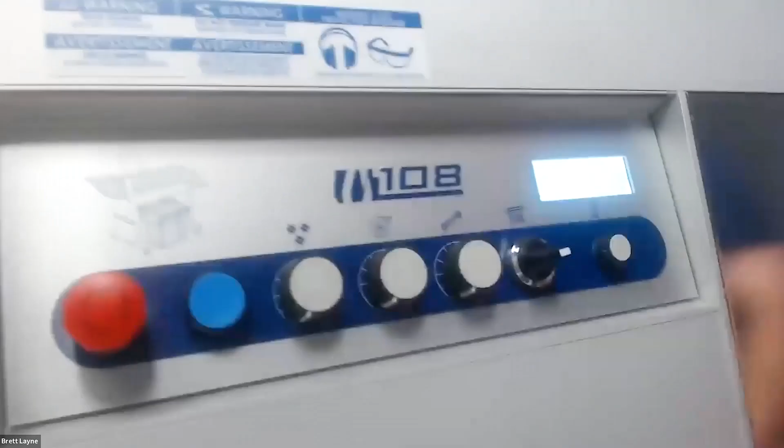I think I've pretty well covered everything there, other than, well, maybe just focus here real quick. Here's your control panel, and everything is variable on the front here, as you saw me do from a distance. But on the close-up, we talked about it being a red condition.

So if the e-stop, sorry? Oh, there we go. If the e-stop is pressed, you'll see a readout right here on the screen that says e-stop pressed. Errors have occurred, e-stop pressed. Tells you where to look. If you take off the safety there for the override, it says check the chute. It lights up here, tells you where to look, and we can put that magnet back on.

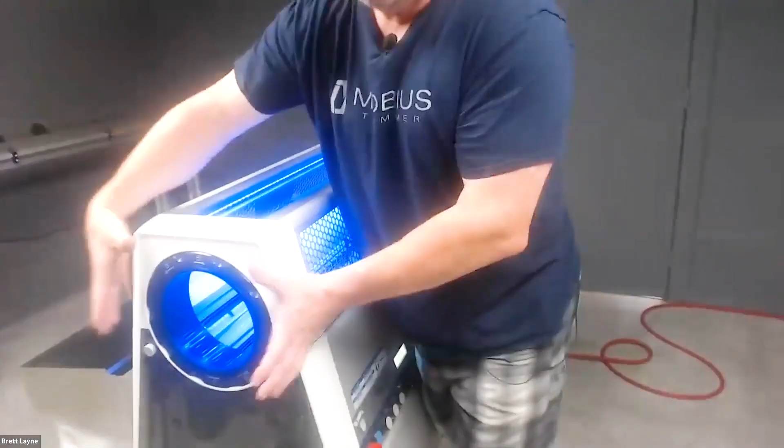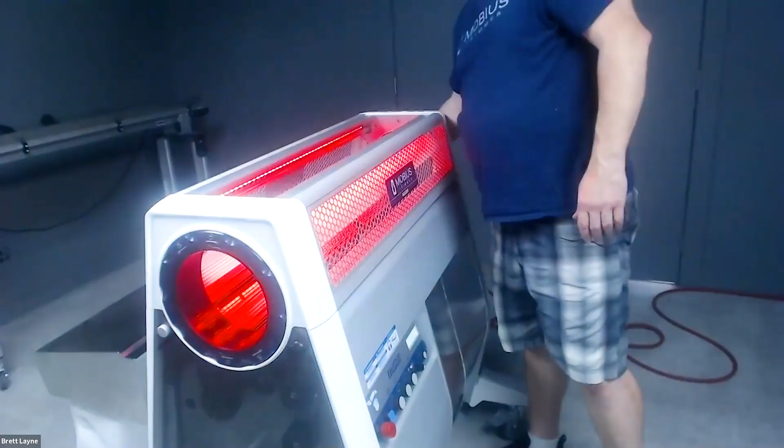Incidentally, let's have a quick talk about that magnet. The machine comes with the hopper and chute. They install just by hanging a little flange in here and flopping it down, and within that body is one of these magnets. So that satisfies the safety requirements to run the machine, and we're running with the conveyors. Then we install what we call these conveyor override pucks here and on the kitty corner opposite side, and you're good to go. I think that's pretty well the whole show there.

What kind of questions have we got, Jonathan? Yeah, sure. So one of the big questions was the impact on trim quality when you're talking about a traditional steel tumbler versus the air thread tension tumbler, and what kind of difference does it make for the air thread tension tumbler? Well, the difference is really stark.

Again, it has to do with two things: the effective cutting system of the Triflex blade system, where you do get that true scissor cut, and then with that tumbler being such a low profile and perfectly cylindrical, you can engineer that relationship down as physically close as you can get. So you're getting a true, nice, clean snip instead of more of a tearing action, and you're getting it as tight to the butt as possible.

So we regularly see people who have seen the videos of our machine running, and then they'll attend a demo, and they'll watch it for a minute or two and turn to us and say, holy crap, those videos aren't doctored. Like, that's real. And yeah, that's what to expect.

We visited one site in California selling high-end hand trim only at about $2,400 a pound. We attended there just this spring before COVID hit, late winter, if you will. We ran a demo there, and we took a portion of that day's crop, ran it through the Mobius, and we took a handful of that and a handful of their own hand trim personnel's product, and we set them down in front of their own QC people, and they couldn't tell the difference. It is, honest to God, indiscernible from hand cut.

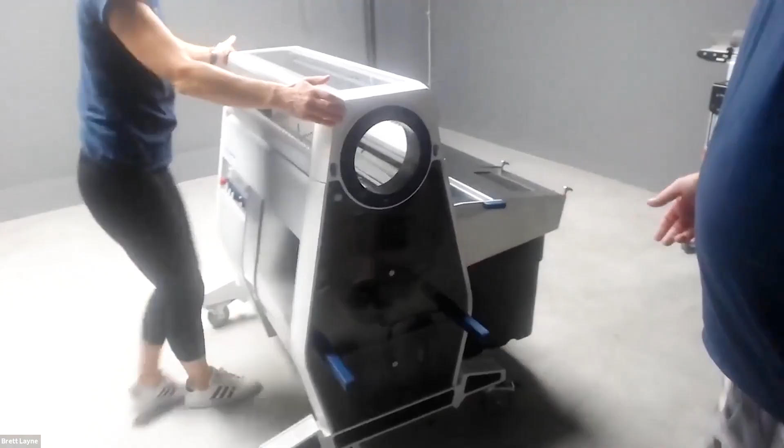So if you find that you want to get it off the base as a whole unit, 550 pounds, we kind of do that fairly regularly here. We don't necessarily endorse it because you could have a bad back, etc. But we can get a person on each handle and lift it up and off of the crate. If we strip her down, as I mentioned a moment ago, a person on one set of handles, a person on the other set of handles, you're lifting about 150 pounds a piece, and it's pretty easy to lift in the event that you need to lift it.

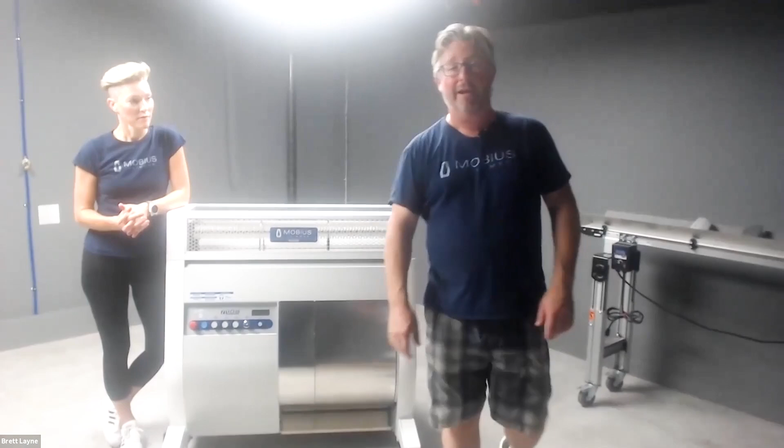With the separator and trim tote removed, the width of the machine will roll through your standard doorways. So if you have a trim room and a separate wash bay, it's no problem to remove those items, put them on your hot swap trolley, roll those to your wash bay, and then independently roll the M108S right into your wash bay as well.

And we did have some questions on hand trimming, and I know that a lot of folks come to Mobius previously using other machines, but if you were communicating to folks that have been hand trimming and are looking to step it up, what would be kind of like the best entry point if they were looking to get into a Mobius system? Entry point in terms of machinery requirements, investment-wise? Yeah, so maybe a single unit with hoppers if they're just trying to get their foot in the door to this kind of system, or do you need to go for the conveyors right out of the gate?

Well, yes and no. To me, it's budget and it's volume dependent. If a Mobius barely fits in your budget, right out of the box with a hopper and chute, it's going to perform beautifully. And if it barely fits in your budget, chances are you've got a volume that you can satisfy with consistent hand feeding. In fact, Dion that I referenced earlier, he did like 700 kilograms a day through a hopper, and he preferred it, but he's like the only dude I've ever met that preferred it.

But it is doable. You just have to be a little bit more dedicated to your trade, because as we touched on in the webinar, the in-feed consistency sort of sets the whole thing in motion for ultimate success. But if your volume dictates, if we're doing that 700 kilograms a day, for example, dabbling in it maybe isn't going to do you justice. It might give you that heads up and say, yeah, you know what? I like the results of one machine, I'm going to expand. But ultimately, you're going to want it to replace those workers that you can't even get into work right now under COVID scenarios, et cetera.